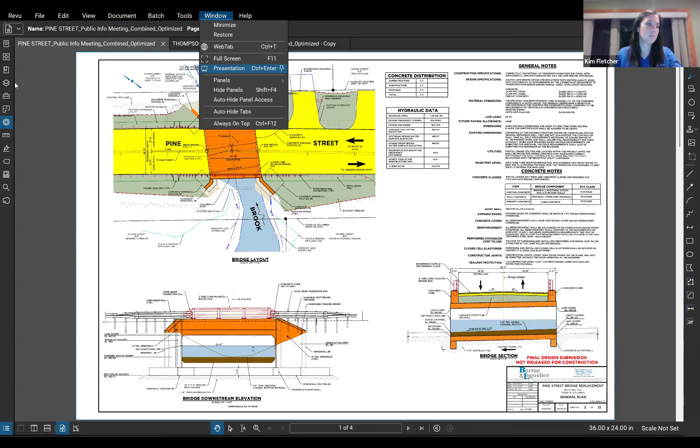Okay, so I'm just gonna go through the existing conditions and then the proposed conditions, and then also talk about our wetland impacts. If anybody has any questions, just let me know. If you want it to be more of like an open conversation, I'm fine with that. Or if you prefer for me to finish and then field questions, that's good too, whatever the committee prefers.

Can I interrupt 1 minute? Sure. It's Mark Walter. Actually, we weren't aware that it was Zoom only, so there's people outside the conference room trying to get in town hall. I'm hoping Stephen Everett's going to open the door. I can come up. I'm downstairs, Mark. Oh, that'd be great, Mary Kay. Thank you. Okay. Thanks, Mary Kay.

Hey, Mark. Hello. I was just wandering around outside the town hall trying to get in. And where are you, Kim? I live in Coventry, so it's not that far away. So I was like, I'm gonna go Zoom it up. So you're back home? I'm back home, yeah. Oh dear, sorry. We didn't realize Inland Wetlands was Zoom only. So this is something I wasn't paying attention to. So it's probably my fault for telling everybody to go to town hall. That's okay.

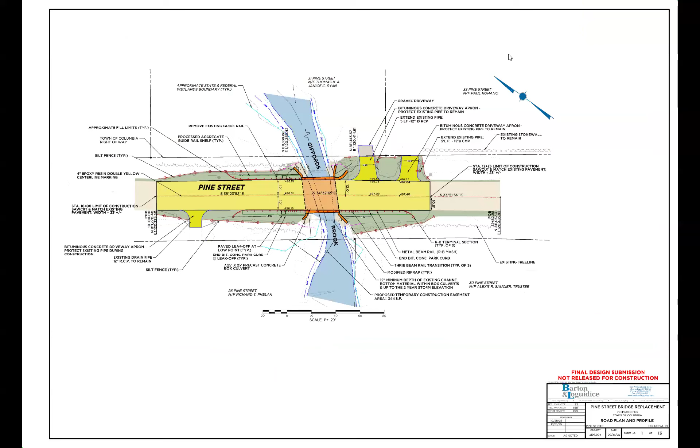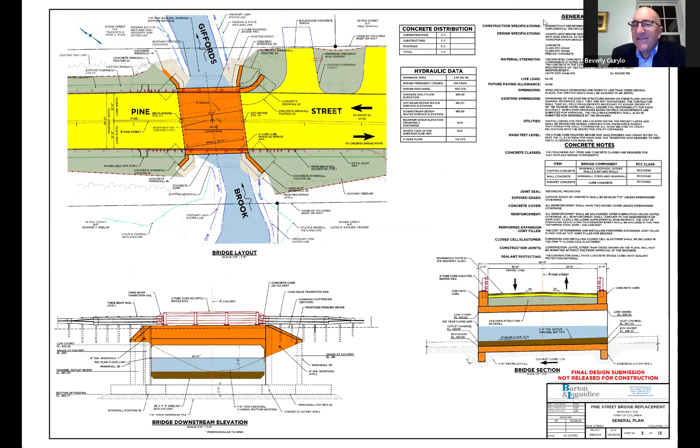Thought we were muted. Oops, what's going on here? In place now? I don't think quite yet, John. Mary Kay ran upstairs to open up the conference room and let people that were outside in. Hi, Stephen. Hey, Mark, hold on. I don't think it's your fault totally. It says on the website that we meet in the conference room. I know, that's why I told everybody to go there. All right, we're getting it set up, okay? Great, thanks, Stephen. Wait a few. I'll make sure that gets fixed. Okay, great. And we turn on the TV? Yeah. Okay.

Or maybe they're on Zoom. That's not on the sign. It's like, it's on Zoom. Okay. All right, because I went last night and looked to see if the meeting was still going, but I didn't see anything that said Zoom. And of course, the time you guys posted, it says Town Hall, November 4th. It's the third. Third, I'm sorry. It's okay. Okay, but if one place says one thing and another place another thing, customer's always right. And Stephen, Mary Kay will be right back up to let everybody in. Is this the right host here?

Okay, so pretty much we're the only ones really affected by the Thompson Hill, because it's in our backyard. There were a number of abutters. Right, everyone agrees with that.

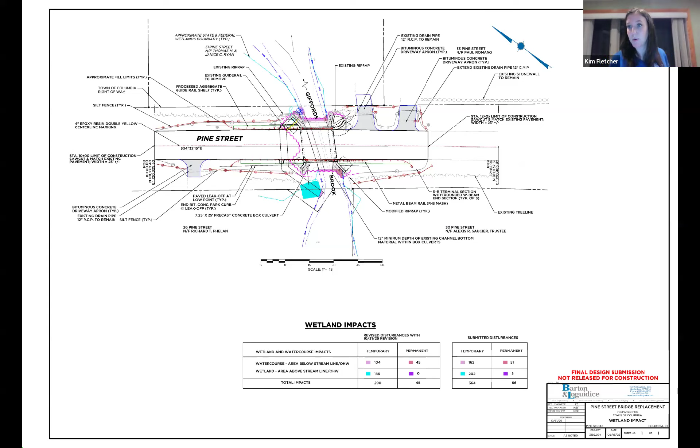I think that's all I have. I can talk about schedule if anybody's interested, but from the one slide I have left, we will need to detour the site because it's all going to be done in one construction season. So we'll be notice to proceed in April with final project closeout at the end of October.

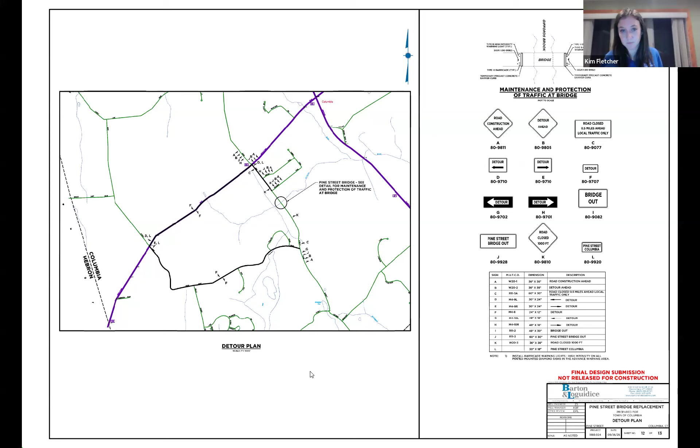So Kim, this is First Selectman Stephen Everett, and I have a question for you. Okay. You opened up with Mr. Ryan's concern about his line of sight, and, as I'm looking at an overview of the site, the job, you said something about trying to minimize one of the walls closest to his driveway, or something to that effect. Yeah, here, let me go to the closer one.

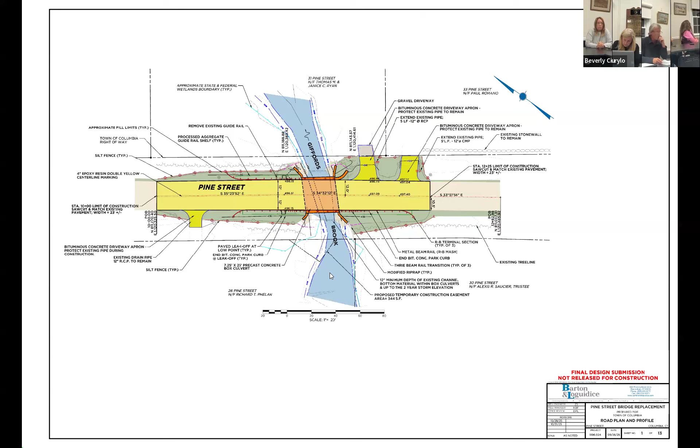I gotta tell you, I went there today, I'm looking at this and I don't know anybody in Columbia who stops 10 feet from the end of their driveway to see the traffic that is approaching left or right before they have to make a decision to gun it out their driveway with the speed that some people drive in town. So I'm a little bit concerned about that. You really do need to explain to me that side of the bridge and the vision that he'll have coming out of his driveway.

Okay. So like I said, we are still talking with Mr. Ryan. We were corresponding back and forth today about how we can resolve this issue. Sightline design is based off of 10 or 15 feet back from the roadway, which is what we were basing it off of. But understanding what you're saying, it's a high speed area and he has concerns with whether or not he can pull out of that driveway. Of course, we're completely open to changing the design however the town, with the input of Mr. Ryan, prefers. We were thinking about if there's potential to use a rail in that area instead of an end wall, which may give him more of a sight line.

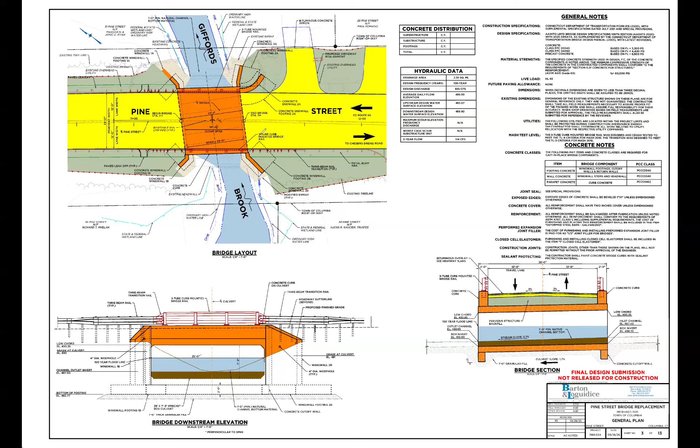The only thing that we could do is we could move the entire end of that bridge back 4 feet to give him the sight line. I think that was what he was discussing today. We could do that. But yeah, it's almost incumbent upon you to do it.

Can I share my screen, Steve, real quick? Yeah, I'm trying to get, she kind of left me hanging there. Is there a button to that? I thought earlier you said you did move it. Did you move it or not move it? No, we did. We moved the entire bridge 4 feet to the west, and then we also shifted the bridge up a foot, and we moved his driveway over a couple feet, so that way we could provide more sight line in that area.

Okay. I can show you the sight line if I can share the screen. I sent this to Kim earlier. It's clearly unacceptable, in my opinion. I unshared, so I think you can share now. All right, I will share.

Art, I was in your driveway today and I took some photos myself because I take everything seriously, so I want to take a look at it. But she did say there's a couple of ways they could do the end of that culvert there that would help with your sightline. So honestly, I'd love to see what you're proposing, if you have illustrations or examples of it that you can show me. I'm gonna show you, Mark. I will show you right now. If you're seeing my screen? Yes.

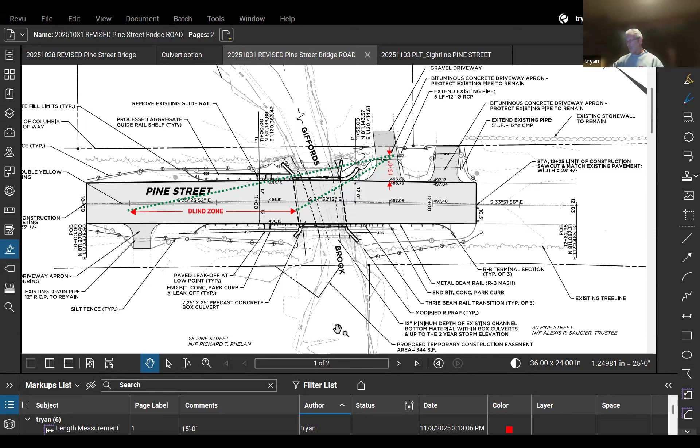I implore you to go out there and measure from the center line to the face of the rail. It's 14 feet. We are going to go out and measure it, Marsh, because we'll be on this point all night long. We will measure. Okay, I have other points. I'll go through them. I don't mean to steal this bill. When you're ready, ask, and I will talk where I think we should go with it. I'll stop sharing. Driveway is next to the bridge too. Any other questions?

I have a bunch. Yes, would you please, okay, Savannah, why don't you? Just before we dig into those points in general, I had two questions. One was if there's a proposed planting plan with plants listed for the wetlands areas. There is one, and I can send that to you. It'll be on the final plan set. Great. Perfect, awesome. All native, obviously, wetland, okay, great.

And then for the bat, was there a survey done for guano, or was it through the Fish and Wildlife tool that it was determined not to need a survey? No, we went out there and we reviewed it, and then we sent it to the FWS, the local field office for their review, and it was signed off on. Okay. Perfect. Okay, thank you. Yep.

Kim, this is Ian Dan on the commission. Can you explain the extent of your drainage watershed studies that you conducted? We used StreamStats to determine the watershed in this area, and then we used HY-8 models to model the bridge. So how far downstream did you guys look? Let me look. Typically, we go at least 50 to 100 feet up and downstream. But I can confirm that for you. I would say, can you send that report out? Yeah, absolutely. Thank you.

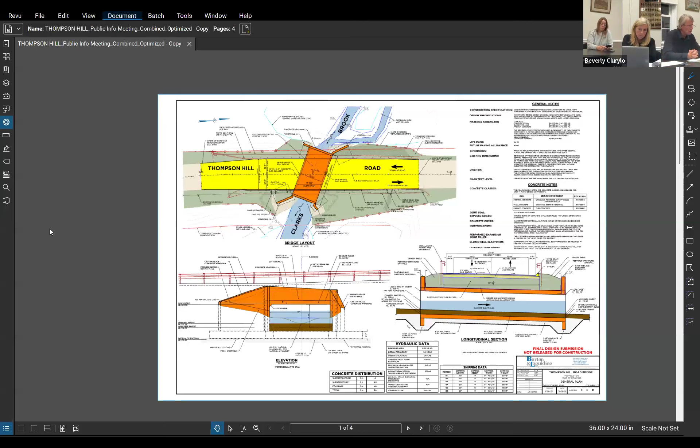Perfect. All right, Thompson Hill Road also has a history of overtopping. This is an existing single 5-foot diameter reinforced concrete pipe, 40 feet long. The town has TRIP funding, the Transportation Rural Improvement Grant Program, so that pays for construction of this project. The existing watershed here is a little bit smaller. It's less than 1 square mile, it's 0.91. But it does have a bankful width of 15 feet downstream. And again, the Army Corps regulations are very clear that if you have a bankful width, you need to be meeting 1.2 times that, which is why we get to that 18 feet.

18-foot culvert. Also, this needed to be designed for the 50-year flood through Army Corps, and the 100-year flood needed to be checked. So we had significant freeboard for both of those, a little over 4 feet of freeboard for the 100-year event. And again, that's all contained within that culvert. We didn't need to raise the roadway at all to get that freeboard at the low point of the road. This one does not have headwalls at the roadway. It's extended to follow the alignment of the brook because that brook was so skewed to the roadway. The most cost-effective way of doing that is to just run the box culvert along with it, and then you grade to those walls. And then we are running a metal beam rail over the top of it because we have enough depth. You need to make sure you have enough depth of fill over your box in order to get that type of traffic handling in, and we could.

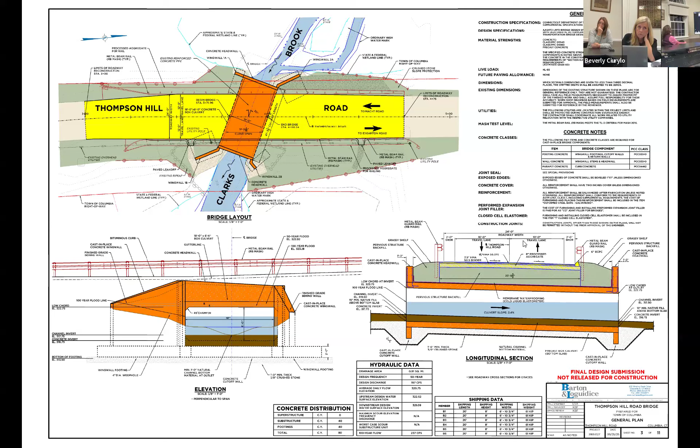Yes. Sorry, is there a comment? No, I'm sorry, I should have muted over here, and the people here. It's all good, he was just asking where our property sits. Oh, okay, the next sheet should help with that.

So within this area, we're redoing approximately 200 feet of roadway. And we are matching to the existing conditions at the beginning and end of the project, which is currently a super elevated roadway in that area. And so we're going to be installing that same roadway type in this. I think when you're coming off of Mock Road, that's where it super elevates and then flattens out once you go over the bridge and up the hill.

Okay, what else? This also is going to be having a bypass pipe. And so again, we're overspanning the existing project so much that we were able to stay outside of the wetlands quite a bit. And so we don't have substantial wetland impacts here. We have 90 square feet of permanent impacts and 168 of temporary. And those temporary impacts will all be restored back to their natural environment after the project is over. Most of it is from removing the existing structure or from installing cofferdam. And then once that cofferdam is removed, it will be reinstalled with wetland plantings or natural stream bed material.

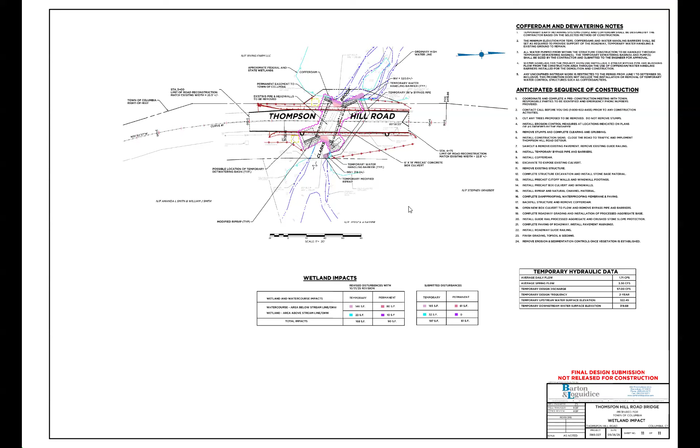Yeah, I mean, it could, but I think maybe it was two different questions if I'm hearing it right. One's talking about how fast the flow is, and I believe, Ian, were you saying whether or not we're inundating that too much? Yeah, that's what I'm getting at is the inundation, and I don't know if any of these would necessitate like a V-notch weir in it so at least for the smaller storms we're not passing as much water as fast, and then the larger storms move through. Like I said, that next culvert downstream is not a huge culvert. Is that on Mock Road? And it does have scouring. It's on Mock Road, yeah. Okay. Yep. That's actually bigger, that culvert.

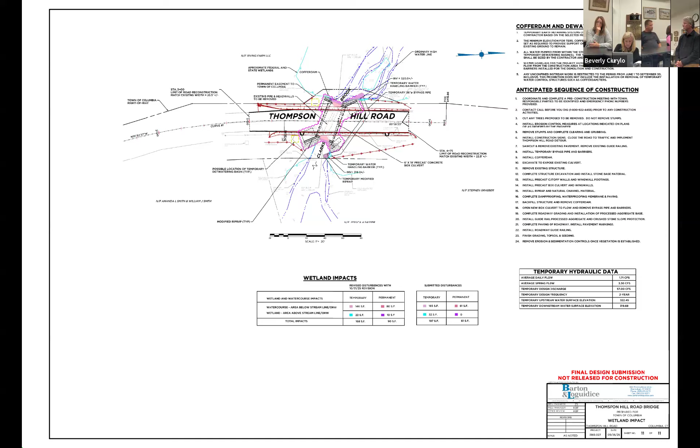It's bigger than the proposed. It's not really that much bigger. The problem, I don't know if, can I talk now? I don't know. You said to say your name.

Oh, okay, I'm William Smith. I own the property at 18 Mock Road, which this culvert is pretty much my backyard. So I kind of know the stream pretty well after 25 years. So my first question is in regards to the culvert that is being planned to replace. Thompson Hill. On Thompson Hill.

That culvert in heavy storms also acts as a dam, where the water backs up into the woods. That's on the other side of the road. Even though it doesn't overflow, it's allowed to back up in there, which is restricting the flow on my side. Right. So the thing is that now if you go and put an actual culvert in that's actually bigger than what's there, you're allowing all that water flow to go down through my backyard and down to the next culvert. The next culvert, I can tell you right now, cannot handle that water.

It's in bad shape. The road right now is actually extremely eroded. The town, you guys came in, you put trap rock in, the guardrail is actually not even attached to the side bank. It's actually hanging because of the amount of erosion. Now, I'm worried that if you let all this water flow through, it's gonna erode back and it's gonna back up into my backyard, because it's gonna have no place to go. Well, until over the road.

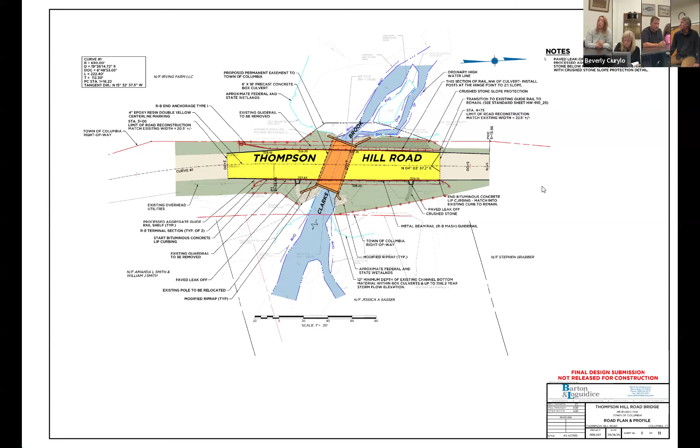Sounds like that could be accomplished. We have to know if the design calculations would affect that downstream culvert. If that wasn't looked at, we should look at that. But that's not one on our 5-year plan that we were looking to replace at this point. That might change, but we were looking at the two other structures, the one on Lower Mock and Egerton, that are in poor condition. Those are not the ones you're talking about?

They're further down on Lower Mock. You did replace the one on Lower Mock quite a few years ago. I mean, Egerton. No, it's on Lower Mock. We did some repairs, but it is in poor condition. Yeah, it's scour. Right. They did the one on Egerton because they did put new guardrails on, by where one lives. Well, that would be my personally only concern, would be just the flow.

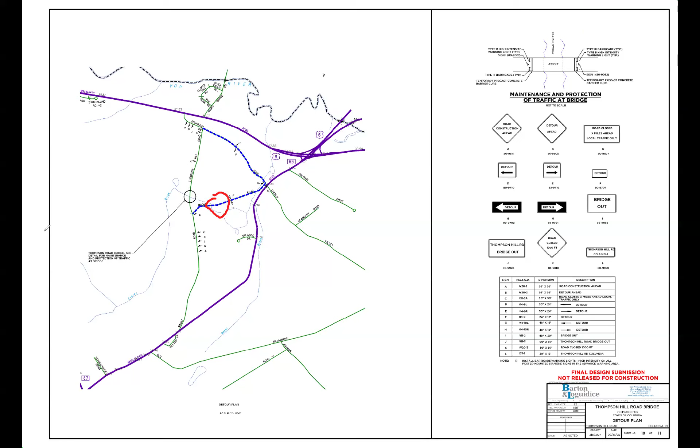So it sounds like we have a request for some sort of flow study, to summarize for the commission to consider. That would be at 16 Mock technically. That's where that culvert is, at 16 Mock. We're talking about this one, right? Correct, directly downstream. Yeah, Kim, this is Ian, I would propose your inundation study needs to go from Thompson Hill all the way to the pond. Yeah. 66. Correct, correct.

Kim, how long would that take to do that study? Couple weeks. We would have to go out there and get more hydraulic cross sections. So survey would have to come out and do that, and then we'd have to run the model. So probably a month. Kim, what would that month delay do? Because we're on a time constraint with both of these large grants for Pine and Thompson Hill. And to get these bids out, our goal was to get them out in November so that we could construct in the spring. What would a 1 month delay do to that?

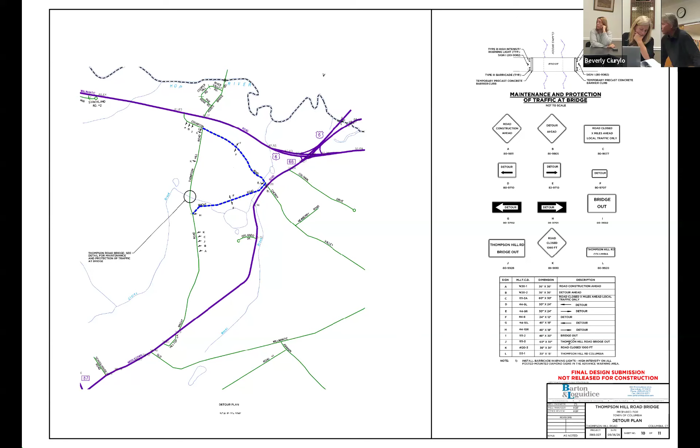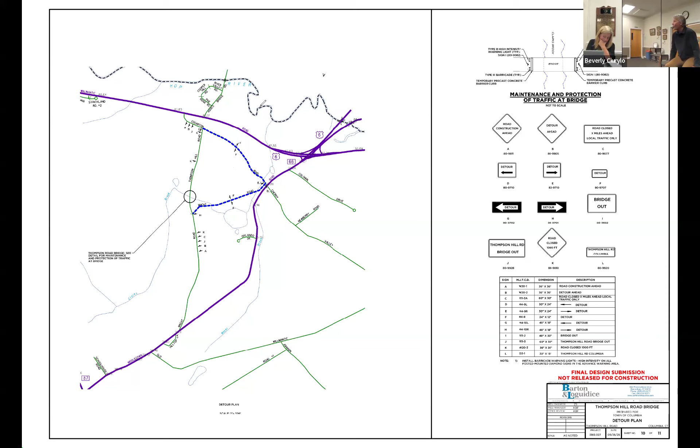If we put it out to bid in January, you're still fine for an April construction. So instead of it going out to bid in November or December, you'd probably be at the beginning of the year. So you skip Christmas. Okay. So I have a question. If we do the study and we're good to do Thompson Hill in April, what happens if the study says exactly that? We're pushing more water through pipes that are gonna force more and overrun the culverts that they're talking about. If the study is as bad as they say, how do we go ahead with Thompson Hill and pray there's no rain?

Good point. Oh, I'm sorry, Kim, I didn't mean to interrupt. No, you go ahead. I was just gonna ask if the size that we're proposing is the minimum for the Army Corps standard you were talking about, or could it be potentially smaller and still fit Army Corps criteria? We could meet with Army Corps and discuss our concerns. I've tried to submit ones that are less than 1.2 times the bank full width, and it's generally a no-go. So in this area, with the bank full width that you have, 18 is the minimum.

Okay, gotcha. And Stephen, I'm fine to start engineering this second Mock Road culvert right away, and then look for another grant down the road. But these grants take years to achieve. And we know each culvert going down has to be replaced. We're undersized town-wide. Absolutely, I understand. But we need to get moving on Thompson Hill, on the grant that we got. Is there a chance we lose the grant if we postpone this? Well, we have a deadline to achieve the grant, and we're already a year behind. So it's not easy.